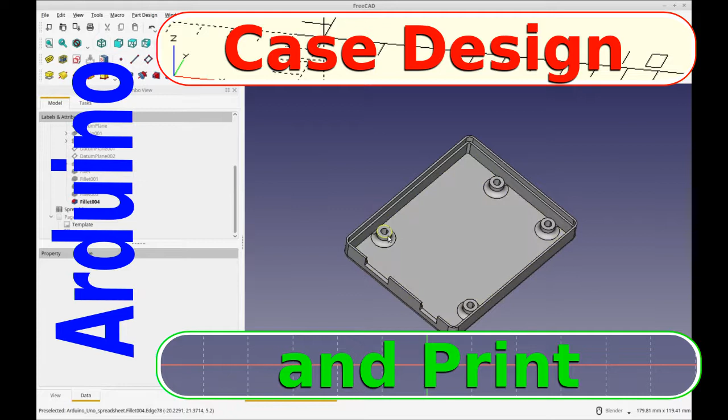Today I'm going to be starting a series on how to build a basic project box for an Arduino UNO. I'll be covering how to design the box as well as test the alignment for the posts and the USB openings. I will also be covering how to use the Spreadsheet Workbench and aliases to set values in your drawings.

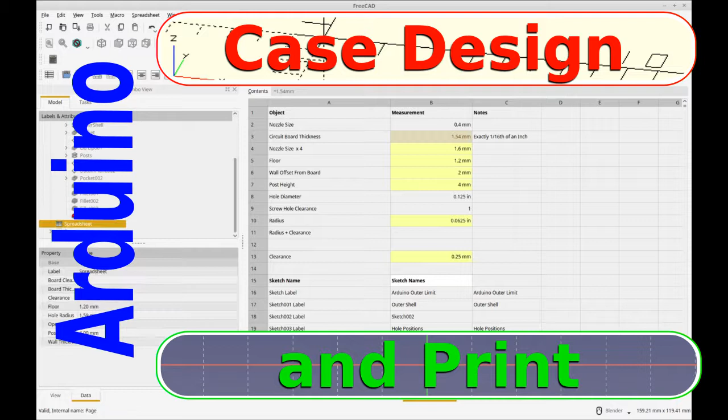The version of FreeCAD I'll be using is FreeCAD 0.17, the daily build, built on June 13th, 2017.

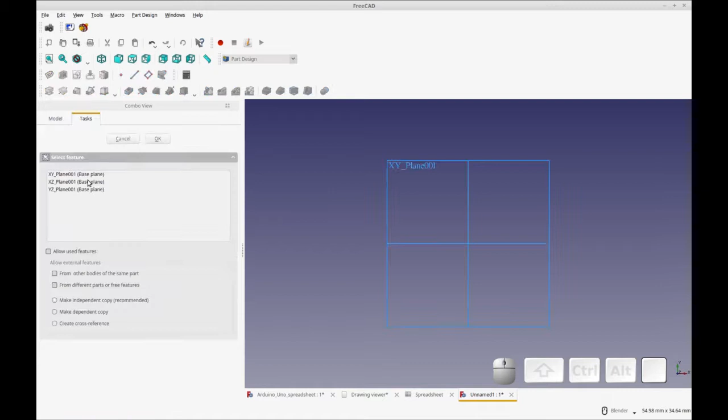To get started, we're going to create a new document, and using the Part Design Workbench, we're going to add a new part and a new body. Then to that body, we're going to add a sketch. The sketch will be in the XY plane, click OK, and then we're just going to add a rectangle to the sketch.

This rectangle is going to be a bounding box for the Arduino UNO, so we're going to set its dimensions accordingly. The Arduino UNO is measured in imperial units generally, so we're going to be using a drawing to get those measurements.

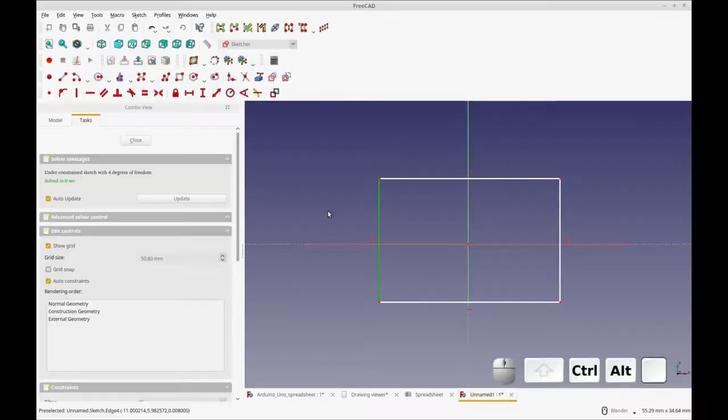The first measurement I'll add is the Y dimension, so I'm going to select that, and then let's move over to our drawing. You can see here our drawing of the Arduino UNO is in mils, that's thousandths of an inch. You can see that defined here, and the outside dimensions are given right in this text, although you could also deduce that from these values here. So it's 2700 by 2100.

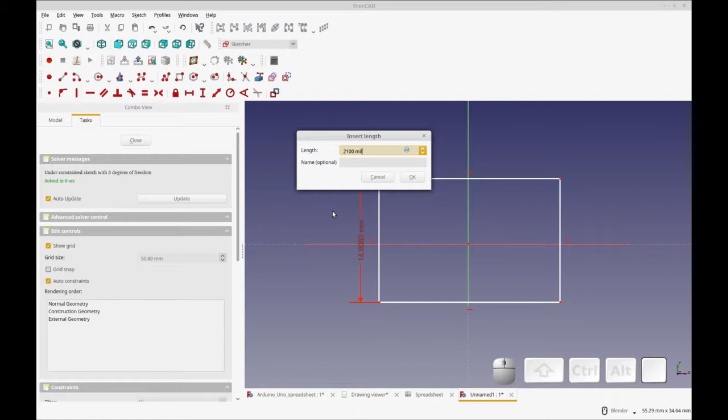So we're going to enter them in mils, and FreeCAD will interpret those for us. So you can do 2100 mil, and then just click OK, and you'll see that FreeCAD has adjusted it to millimeters.

We'll do the same thing for the horizontal or the X dimension here, and that was 2700 mils. Now I found that these dimensions aren't exact for my UNO, but I think they'll be close enough for most that you'll be able to use them, and if you need to adjust them in a tiny amount, you'll have to do so. You'll see that it's adjusted to millimeters for us, which is useful.

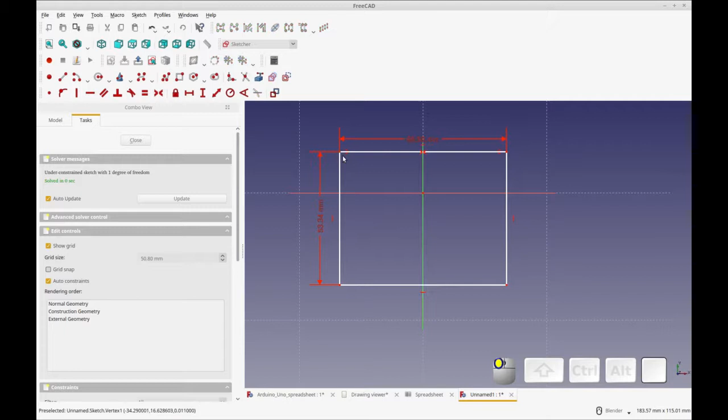Now we're just going to finish the constraining of this by doing two symmetry constraints, one on the horizontal and one on the vertical. And then this sketch is done.

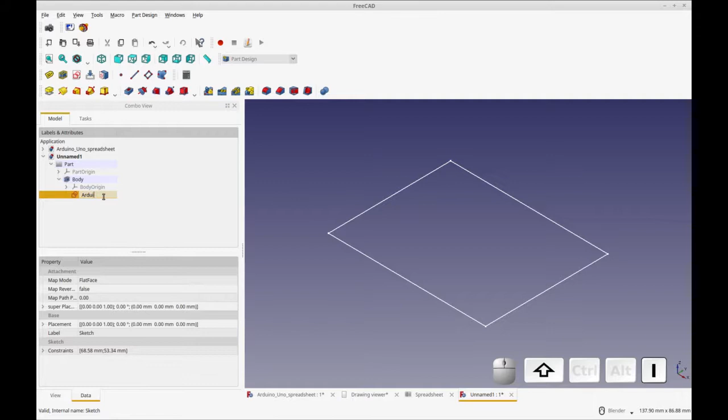Now this sketch is really going to only be used for reference, and it helps us to know where our Arduino is. After I finish constraining this sketch, I want to rename it so that it's easier to identify. So I'm going to call it Arduino Outer Limit.

The next step in creating our project box is to add a sketch that defines the outer edge. To do that, I've created a spreadsheet using the Spreadsheet Workbench. You can see the Spreadsheet Workbench is here, and I've given some labels and aliases.

So for the aliases, I just entered the value, and then in the Spreadsheet Workbench, you select the cell you want to change and click Alias, and then just type the alias in. So you see I've created nozzle sizes, wall thickness, UNO length, UNO width, and offset from board.

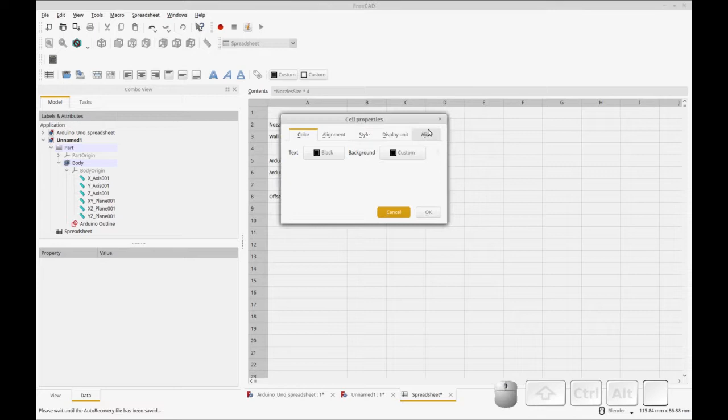You can also right-click on this, click Properties, and select Alias, and enter it there as well. The effect is the same. So we're going to use some of these aliases in the next drawing, wall thickness and offset from board.

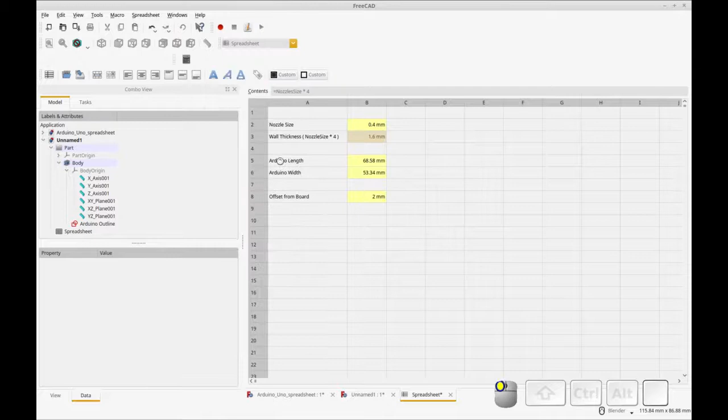So we'll need to change back to Part Design. We'll need to select the drawing in our tab here, and with the body active, which it is, we can create a new sketch. We're going to put that on the XY plane and click OK. And to the sketch we'll add a rectangle.

To constrain the lengths, I'm going to select the corner here and use external geometry to the Arduino board. Now it's not recommended to use external geometries unless you have to, and I'll show you a way to get around that. So next we're going to add the formula for this constraint.

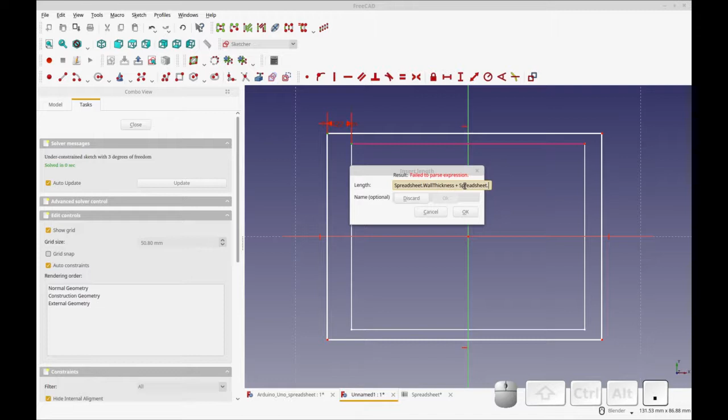To add the formula, you click on the f of x icon and start typing spreadsheet, and you can down arrow to select that, and we're going to do wall thickness, and it's plus a spreadsheet again. In this case it doesn't do the intelligent select, and this one is board offset.

Now you know you've typed it correctly because you've gotten a result back. Click OK, click OK again, and you see our value is updated.

To do the second one, we're going to do it a little different. I'm going to select that external geometry again, and we're going to add a constraint that way. But instead of doing it here, I'm going to show you how to do it outside of the sketch.

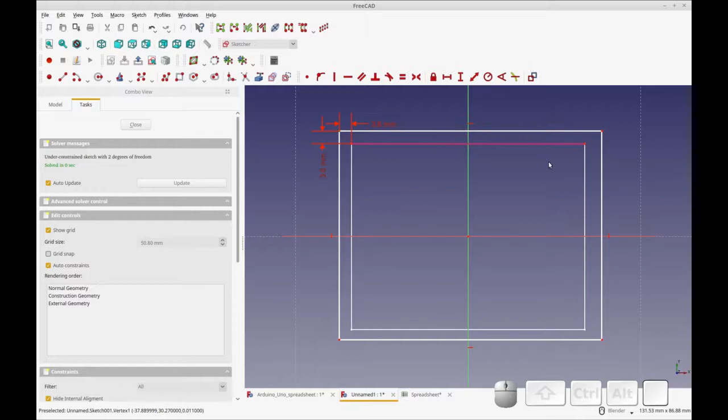Now we'll need to go back in our sketch and finish constraining this. I'm going to be selecting the two endpoints and the middle line and doing a symmetry, then I'll do the same thing on the vertical as well. Now you can see our sketch is fully constrained.

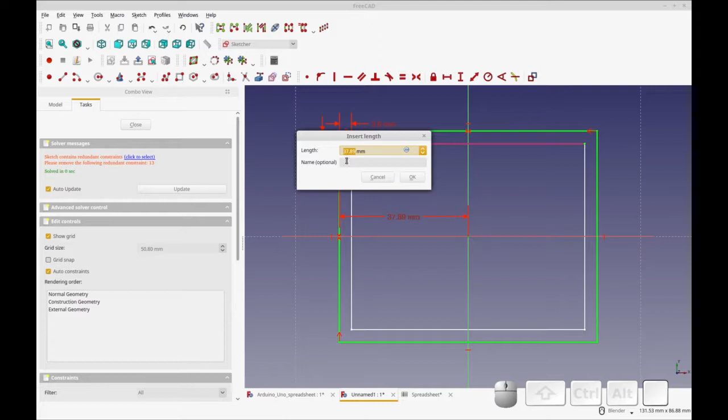If you wanted to eliminate this external geometry, which I recommend, what you can do is select this point and the center point and do a horizontal constraint, and you'll get your resultant measurement. Now this won't get updated by the spreadsheet, although you could put in another formula that's a little more complicated.

So with our sketch fully constrained, we can close this and move. Let's rename it real quick, and we'll say project box outer. Let's change it to project, and that sketch is complete.

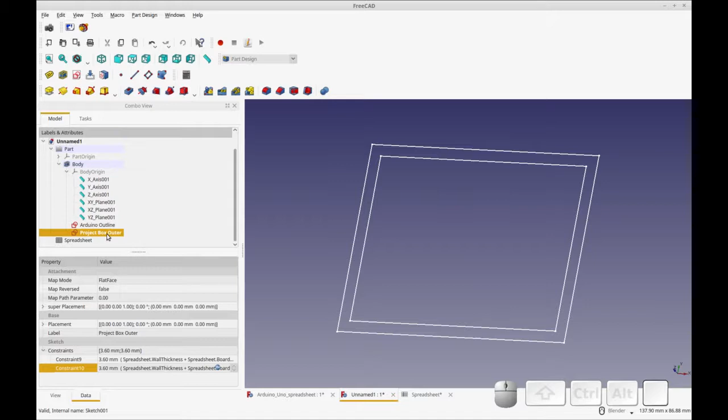The next thing we'll be doing is padding this sketch. So to pad the sketch, you simply, with the sketch selected, you select pad, and we're going to leave it at 10 millimeters for now.

With the pad completed, we're going to create a sketch to remove the inner portion of the case. So I'm going to select the upper surface of the pad and add a sketch to it.

Now I want to note here that developers have been switching to using datum planes to attach, but I found in smaller drawings it's not too difficult to manage with just attaching it to the surface.

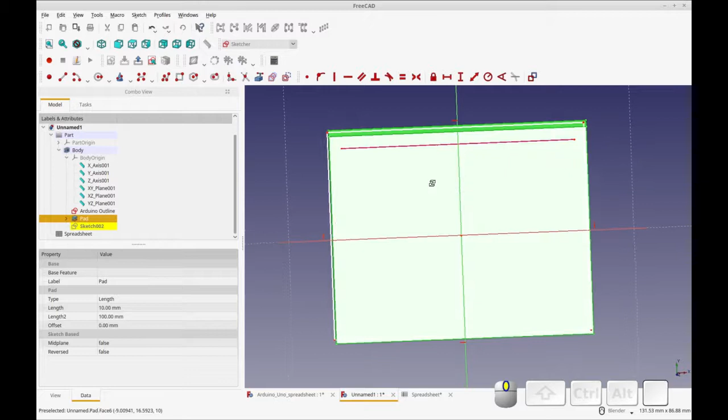So in order to constrain this, we're going to move back to the model and we're going to hide this pad so we can easily see the Arduino outline, and we're going to add the external geometry. So if I add the pad back, you will see that the geometry comes through, which is a nice feature.

So I'm going to select these two corners and do a horizontal constraint, and we're going to add just the board offset to this formula. I'm going to select the icon f of x, and we're going to do spreadsheet and board offset. So when it's just one parameter, it's really easy.

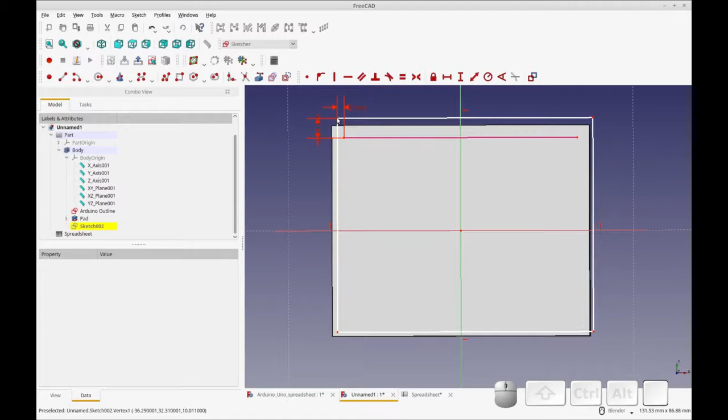So with that constraint selected, we're going to add a constraint here, but we're going to modify that constraint outside like we did before. So the final thing we're going to do is add symmetry, and we'll add symmetry here as well. And that fully constrains our sketch. You'll notice it's too big right now, but when we change it, it'll be okay.

So now we're going to close the sketch. We'll select it here and go down to our constraints, and I'm going to copy the constraint and paste it here. Oops, try that again. And you'll see it updated the sketch. So that's part of how to do parametric.

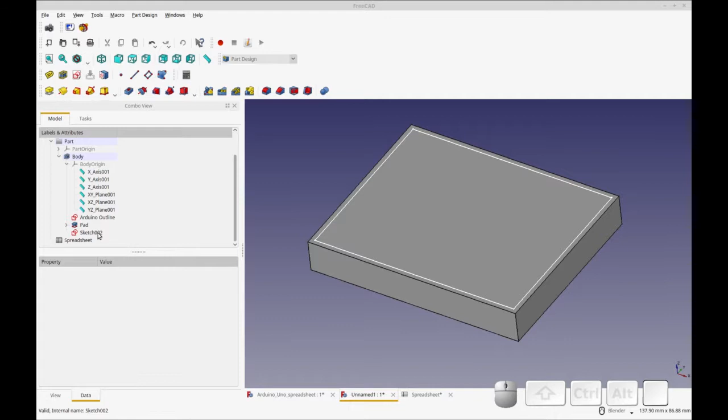So now the next thing we'll do is we're going to pocket this down into the pad. To create the pocket, select the sketch we just created and then click the pocket icon. We're going to leave this at 5 as we'll be completing the depth with a formula.

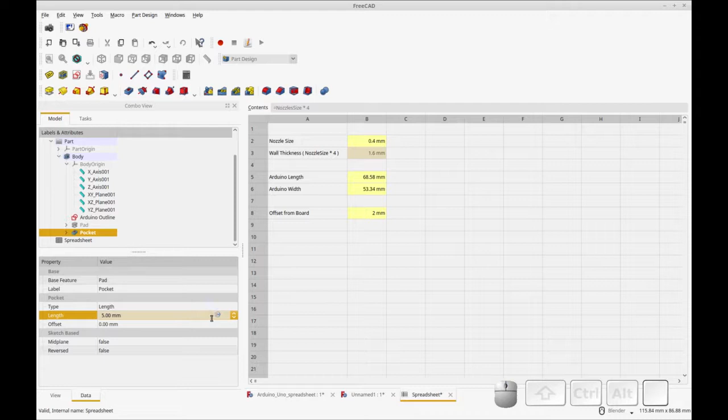To create the formula, select the pocket and then in the length field select the function icon. We'll be using values from the spreadsheet. So type in, first we'll add the pad length, so type in pad, then period, then length. You can select it from the drop down list and you can see it's already got the 11 millimeter result, which is the length of this pad.

So from that length we're going to subtract the wall thickness in the spreadsheet. And that alias is here, and it was wall thickness.

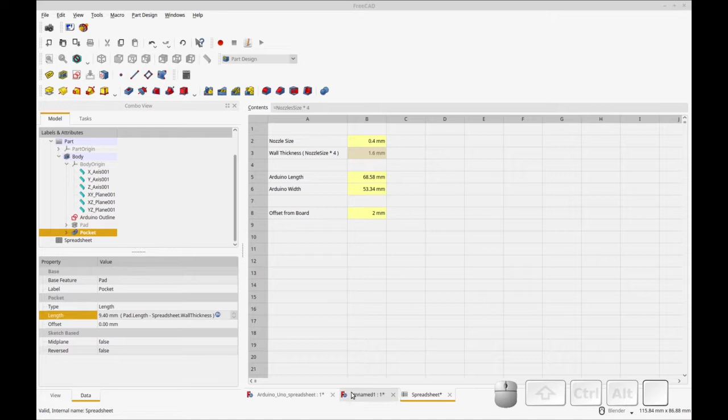I think it's a capital T. Right, so now you see the result is 9.4. So that'll give us a more robust solution, that as this pad changes, this pocket will change accordingly.

You'll notice I've now got an error introduced into the pad formula, and that's a bug in FreeCAD. The problem is that this alias doesn't specify a unit. Even though it's displaying with millimeters, the actual value doesn't have a unit, and that's because I can't enter a unit there on that formula.

The fix is sort of a typecasting, and you can see the fix down in here is I multiplied wall thickness times 1 millimeter, so to infer the unit. So that's fixed on this one.

You see it gives me a proper result, and now I'm going to fix it on this one so you can see that in action. So I multiply the wall thickness, so that's the one I can't have a unit on, times 1, and that fixes that error there, and it should propagate up. Yeah, so that fixes our error. So that's a little extra workaround included with the video.

Now that the pocket is complete, you can see how our formula is valuable. I'll change the size of the pad, and you'll see that only the walls change and the floor stays at the correct distance for printing.

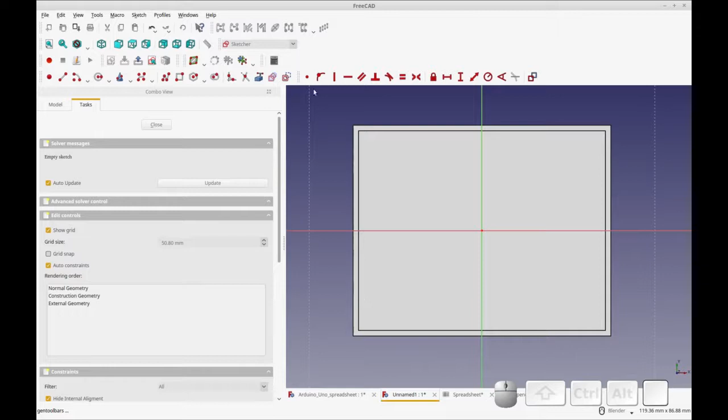I'm going to select the same plane and add a sketch to it. I'm going to create a rectangle and constrain it much the same way I did before, using the Arduino outline, and we'll hide the pocket. We're going to create external geometries here, and we'll create a constraint this way.

In this case, it's just going to be simply, I think, just wall thickness. So let's look that up in the spreadsheet to find out. The measurements we're going to use are from the spreadsheet. It's going to be wall thickness, divided by 2. And because of, actually I'll add that later, then it's going to be plus

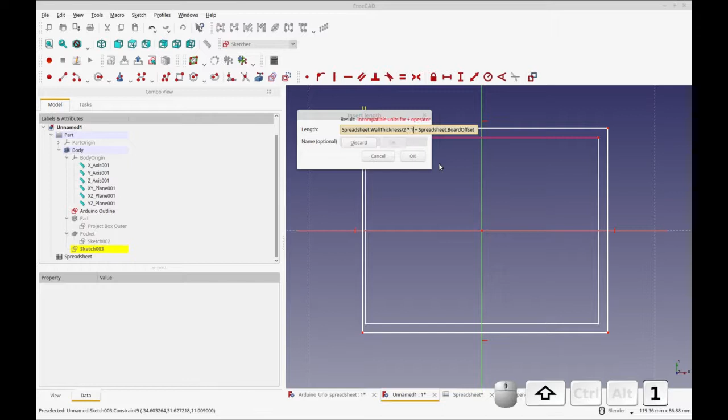spreadsheet and board offset. Now that's going to be incompatible like before, so we can just multiply this by 1 millimeter to do a typecast sort of fix. So that's our setting there, and then we'll do the same thing for this guy.

And I'm just going to change this right. Now you notice I don't have to leave the sketch to make this change. So I can edit this.

Now depending on your version of FreeCAD, you may not have to do the 1 millimeter fix. This was a bug that I think was introduced somewhere along the point in 0.17.

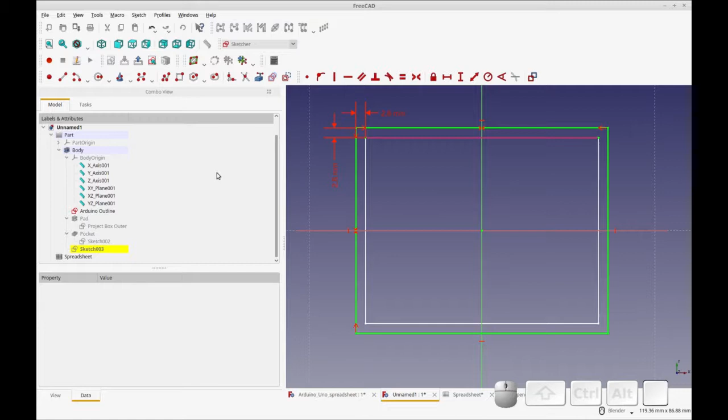So finally for this sketch, all we have to do is add a symmetry constraint in both directions, just like before. So this process just repeats a couple of times for these alignment things. And let's close the sketch to see if we got it right. So you see that ledge is halfway between these two.

So now we're just going to pocket it. In this case, I'm just going to pocket it 3 millimeters. I'm not going to make that parametric. Now that pocket will follow the top.

So if I change this pad, that pocket should follow along. Yep, so that would be a little bit too much, I guess. And let's put it higher. And you see that follow along nicely. So you see this still works.

We don't need datum planes yet. So I think as long as the items aren't too complex, you shouldn't need datum planes, but you can't take that to the bank.

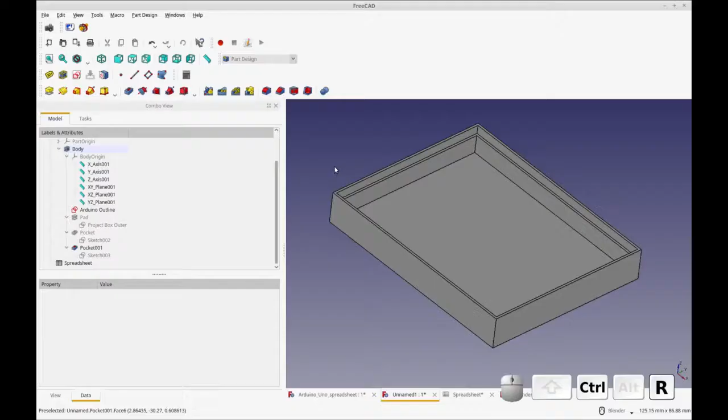With the basic shape of the project box complete, we'll add post mounts for the Arduino on the bottom of the case. We'll select the bottom of the case, and with that face selected, we'll add a sketch. On this sketch, we'll add 8 circles.

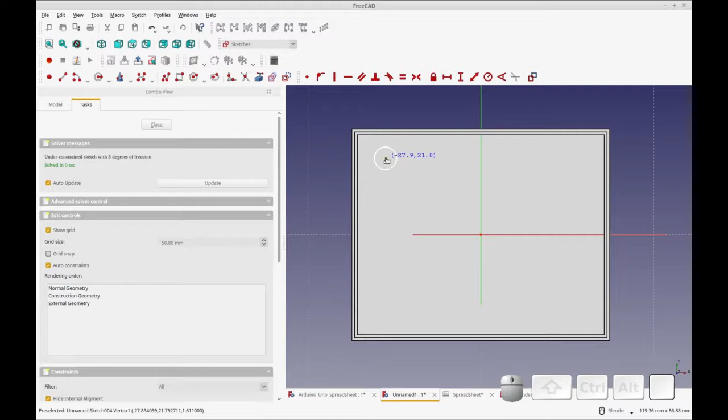So to create the post mounts, we'll add 2 circles in each corner. They'll share the centers, so that'll create a wall for each post. So we'll do that in each corner. And after we've created the four circles, we'll set the radius.

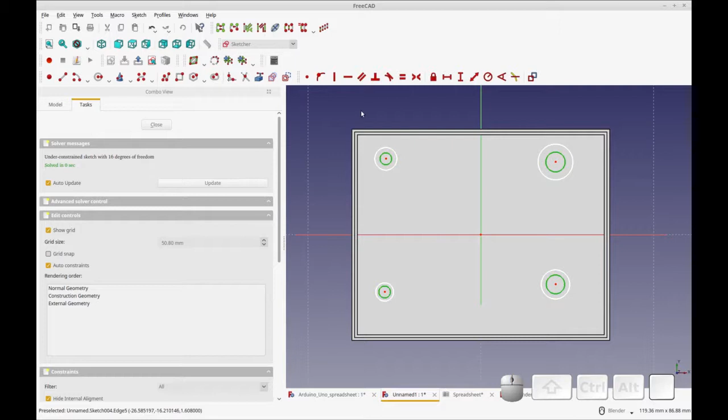To set the radius, we'll select all 4 inner circles and click the radius constraint. We'll share all the constraints, and the value will be 1.5 millimeters. To set the radius for the outer circles, we'll select all four and select the radius constraint. We'll share the value and set that to 3 millimeters.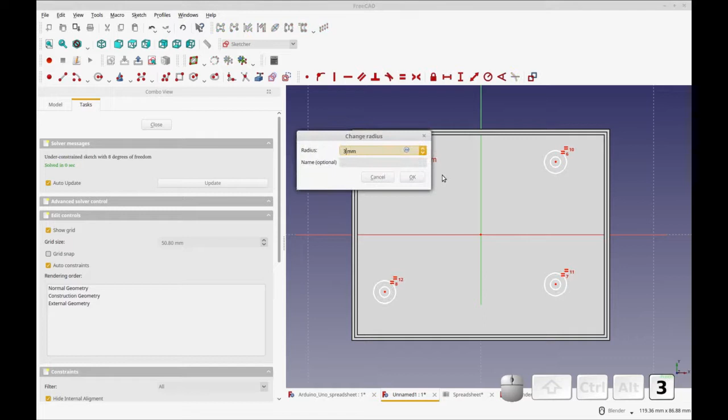To set the position of each of these posts, we're going to be using a different drawing, and this drawing shows the dimensions of each post in relationship to each other, pictured here, and you can get it from this link, which I'll put in the show notes.

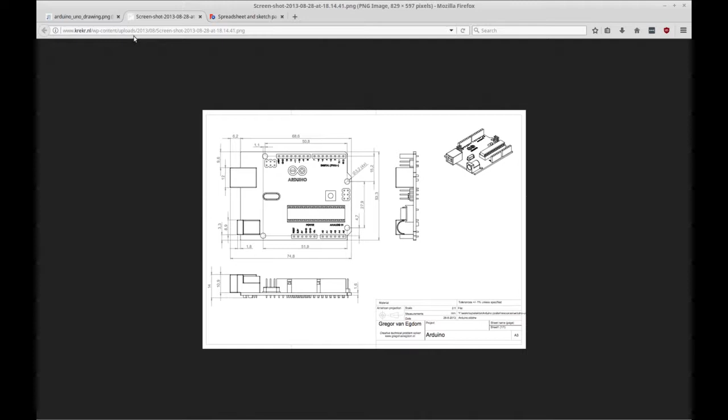So the way this works is we move around the whole object, constraining each post to each other. The difference in length between those two post centers is 1.27 millimeters. Then the next one, from here to here, is 50.8 millimeters. And I do from here to here... or, nope, sorry, I'm going to do from here.

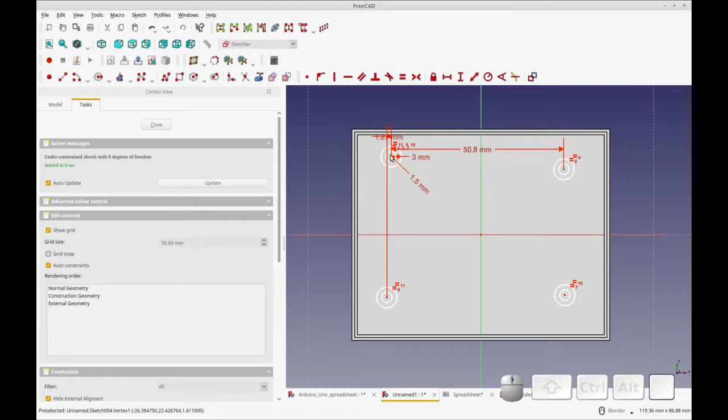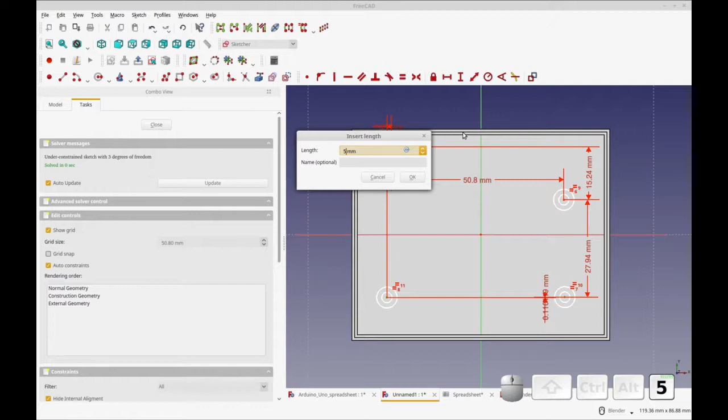We're just basically going around the square, setting all the offsets from each other, and you see how it's just going to push each post into the correct position. Finally, that's 27.94. And then this one is offset from here, and that measurement is 5.08 — I had to look down for that one.

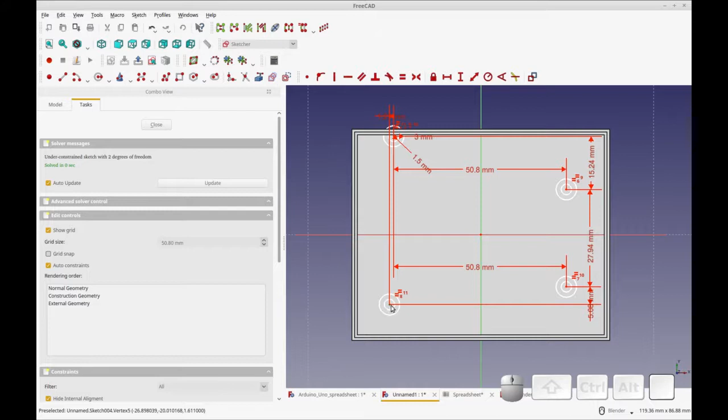And then finally it's the distance from here to this point. So we're just kind of going around in a circle or a square. So then they're constrained to each other — you see how they all move in. So the final one is the distance from this corner to the corner of the Arduino.

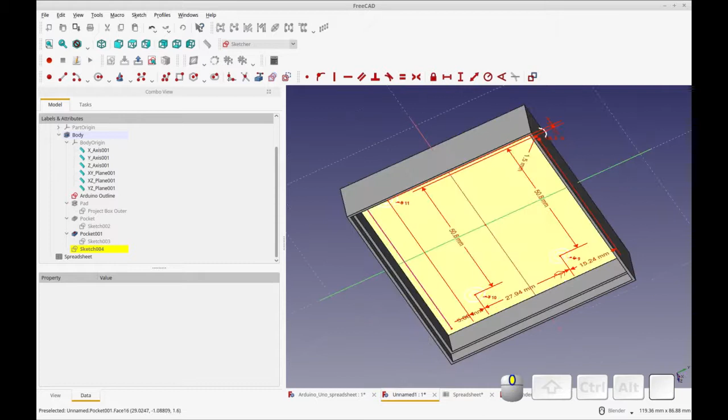So we need to bring in the Arduino outline. Another way to get external geometry instead of hiding is you can just rotate. So there's my Arduino external geometry, and I can select it, and then it'll show through to the working plane.

So now all I have to do is set these final distances. The distance from this post to the edge of the Arduino is 3.97. And then this post to the edge of the Arduino in this direction is 2.54.

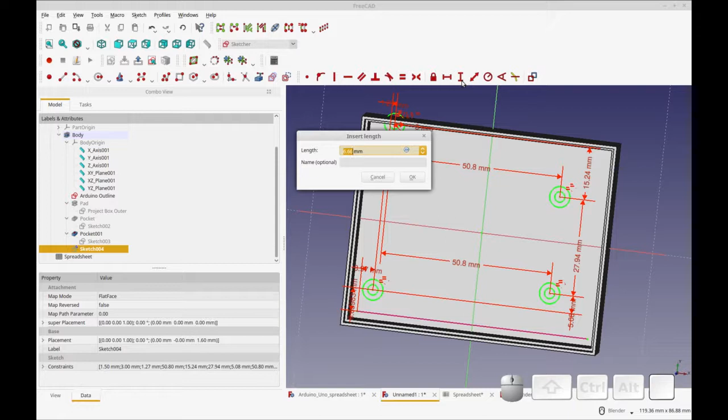And you see now our posts are fully constrained.

Once our post sketch is complete, we're going to add a height of the posts in the spreadsheet. This is so that we can easily change the height of the posts. I've added a variable, or spreadsheet entry, here for post height of 3 millimeters, and I'll use that when I'm creating the pad of the post.

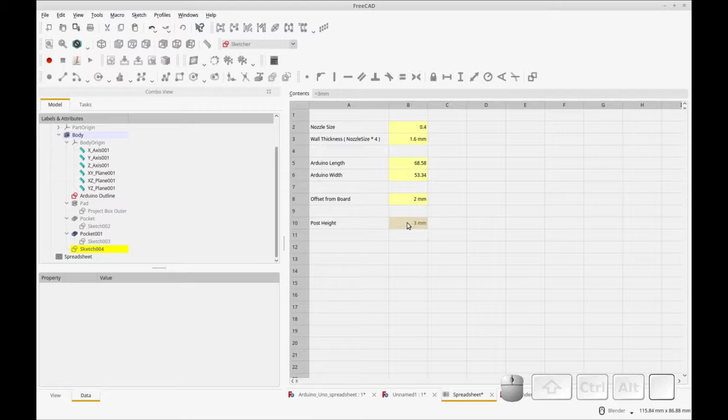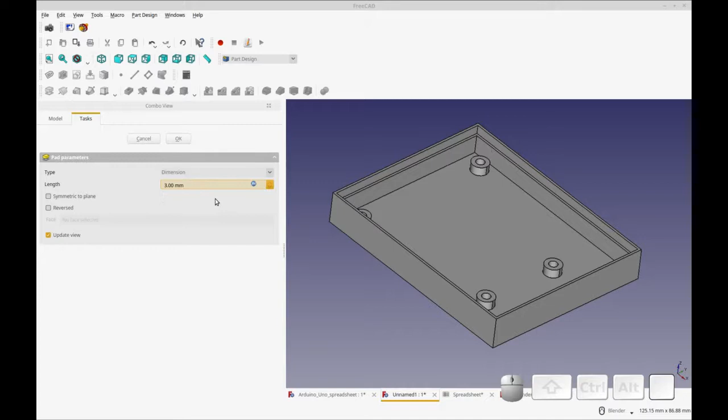So we'll move back to the drawing, close this sketch, and pad this sketch. In the pad value we'll go to the spreadsheet and select post height. That will allow us to move the posts up and down as needed.

I selected 3 millimeters so I had plenty of clearance for the soldering tabs underneath. The very last thing we'll do to this case is add fillets.

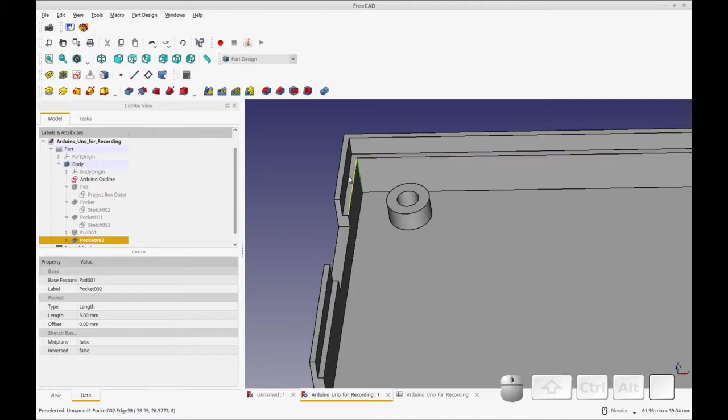What I've found is to get larger fillets on the outer corners, you should do the inner corners first, because I want a 3 millimeter fillet on this, and if I don't do these first, that would make the outer fillet — if I did the outer fillet first, it would try to be inside this corner, which would make it invalid, and FreeCAD won't let you do that.

So I selected one line segment to start my fillet, and it adds it with a 1 millimeter value, which is what I'm going to use. Then I'm just going to do add reference to each of these corners.

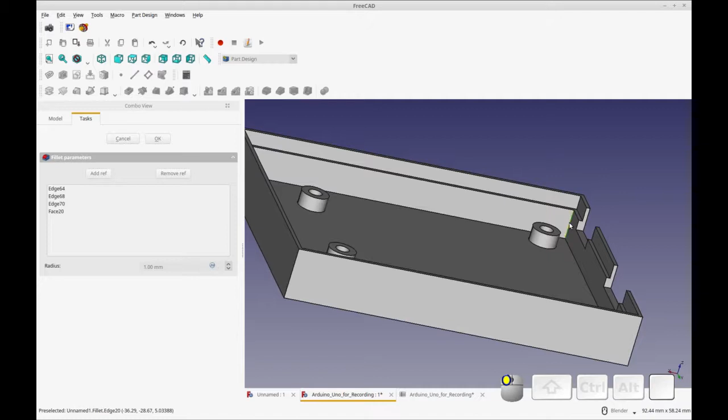I mistakenly selected the face, so we're going to do remove reference, then add reference again. And so that's our internal fillet.

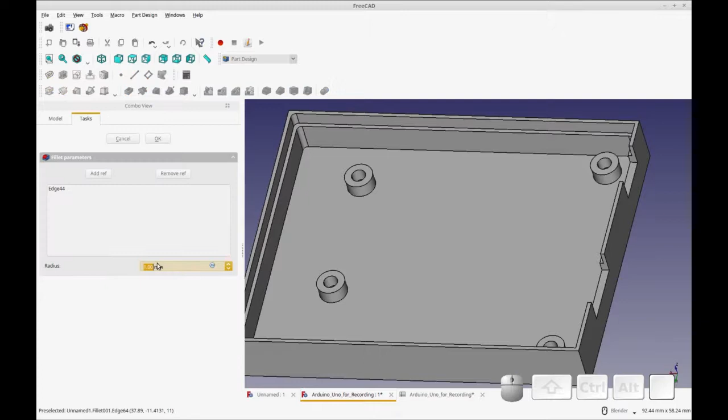Now I'm going to do this fillet. I'm going to select one of these — this is going to be a 2 millimeter fillet. It might not be the exact correct value, but that gives it a little bit of continuity around the corner. I'll show you at the end.

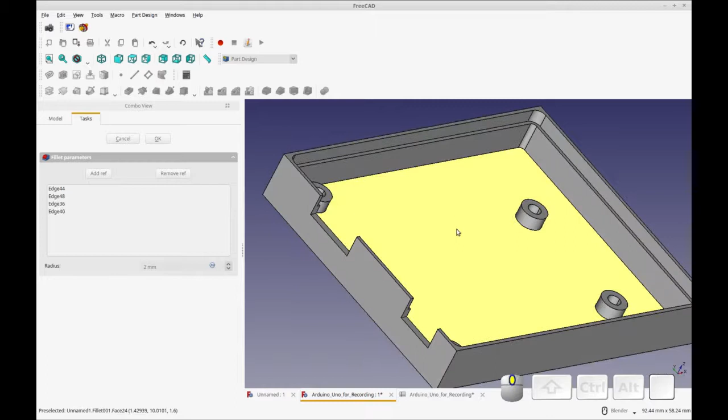Now I'm going to add each corner as a reference. You can actually select all of them at once before doing the fillet, but I find I do a lot of misselections that way, and I get the job done better this way. So that's a 2mm fillet, and then on the outside we're going to do a 3mm fillet.

I'll show you that using the control key, you can pre-select the segments you want. Okay, now I'm going to add the fillet for that, and that's going to be 3.

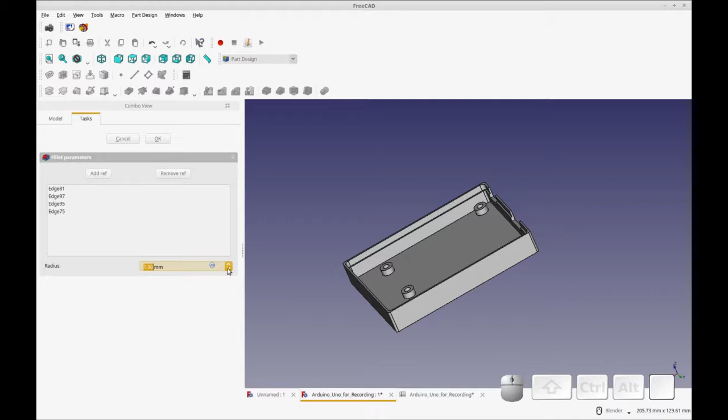And then on the bottom, I've filleted this before, but I found that when I print it, it just comes out as an angled line. So this time around I'm going to try it just flat and see if I like that.

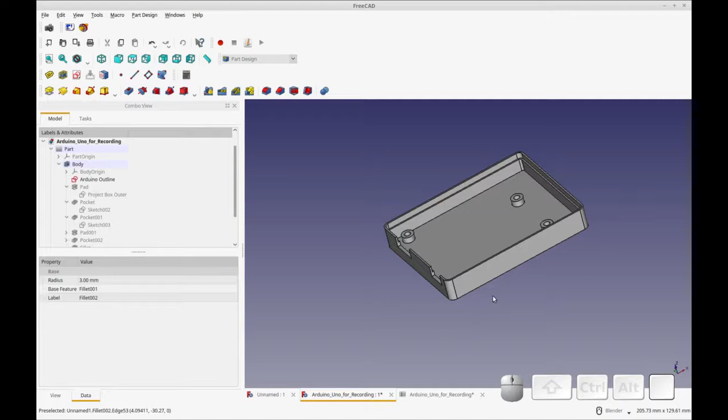In the pictures I'll show you soon, you'll see this bottom corner rounded, and you can do that. I'll show you real quick: if you select the whole face and then just add a fillet, you'll see it adds it all the way around, and you can make that as big as you like.

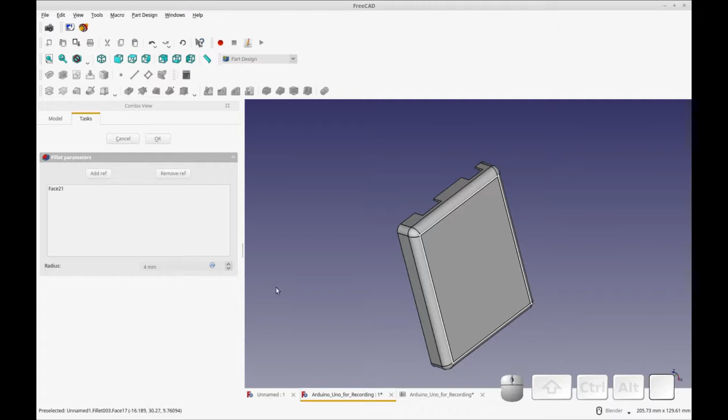Actually that's probably going to be invalid because that line's poking through, so you could fillet that if you want. Actually, I just will. So that's our finished model.

So the next thing we're going to do is go into TechDraw, and what we're going to do there is get drawings to make sure our measurements came out well. Now that our project box is complete, we're going to go over into the TechDraw workbench to make some drawings. You can select the TechDraw this way.

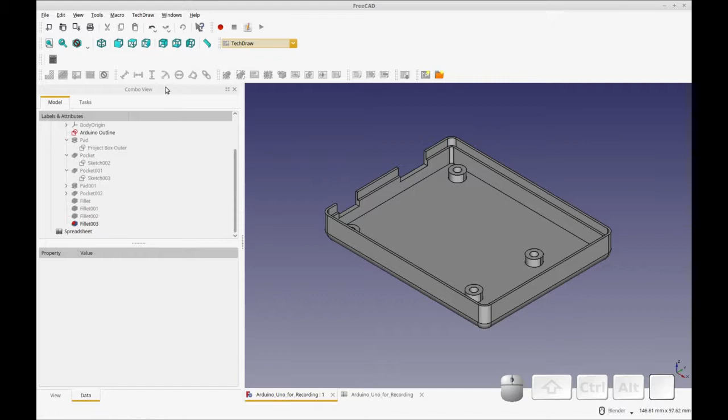These two icons sometimes show up over here, sometimes over here, I don't know why. So I'm going to insert a new drawing, and you'll see it's scaled to A4, which is good if that's your printer. Mine's not—mine's in the US, so I need a US size. Unfortunately there's no templates for US.

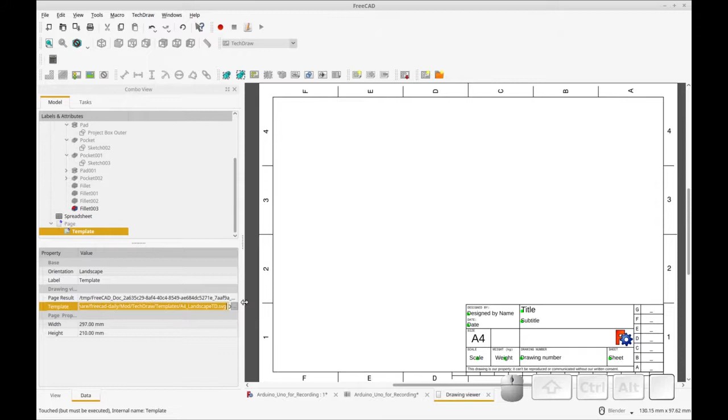So what I did was I created one in Inkscape and put it in the template directory. What you can do then is go into this template, and you can see this is where it's stored. Thank you, developers, for listing the directory—that helped a lot. I can select the directory and then pick the 8.5x11 I made. I don't think that template is perfect, but it works well enough for me.

And why it's important to have the correct size paper—I don't want my printer resizing anything, because I'm going to use this to test my drawing.

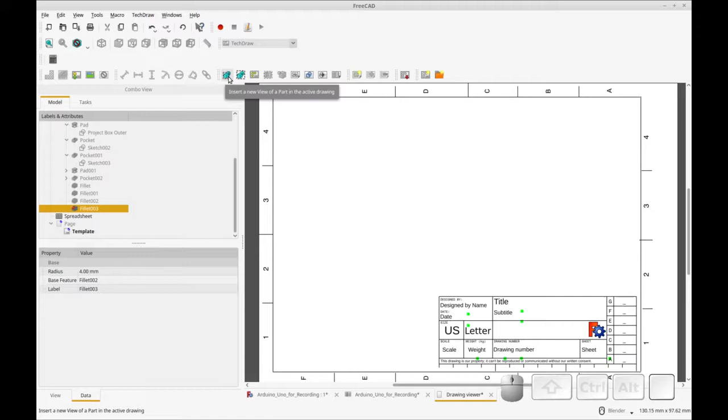So now what you do is select the final item or final feature in your drawing, and add that to—I've lost it, this got moved too—so, you add that to your drawing. We're just going to do the one part.

So now I do want an end view of that, and just to show you the feature, I'm going to show you, let's see, where was it—I'm going to show you how to do a section view.

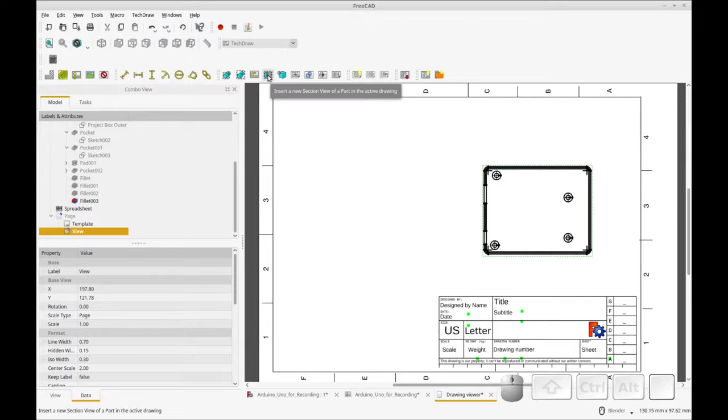So it's using this section view icon here, and you just click that, and then it asks you what section view you want. For me it doesn't matter—I just want the USB port and the power port, so I'm going to do this direction. So I'm going to pick this, and you see it's put our section view in there, and that's good enough.

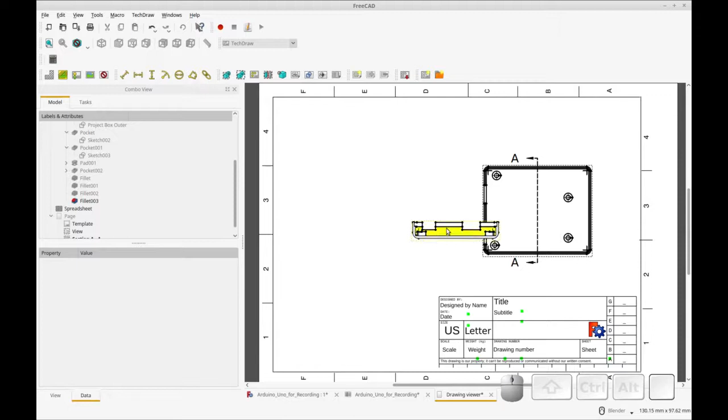So now I really don't need the cross-section view, I just needed the openings, but this certainly doesn't hurt to know. I could test the post measurements too and stuff like that.

But what I need to do is print this out, and I'm going to be holding my Arduino right up to it to see how close I am. And one of the things I do know is that these lines are too thick for that.

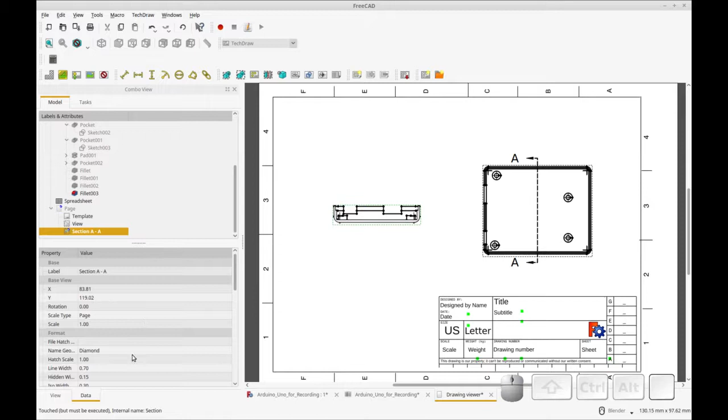So what I'm going to do is go into the section view and change the line width to just half of what it is here, so now when I print it out, I can see a little bit better if the Arduino lines up.

And I'm going to do that to this as well, so I'm going to change the line width to 0.35. And then, so now I can just print this. I would just go into File, Print, and it's going to print. I'll do a print preview, so it's going to print your drawing page.

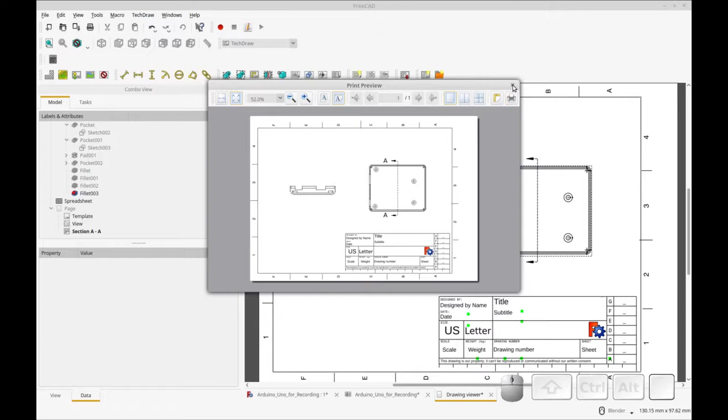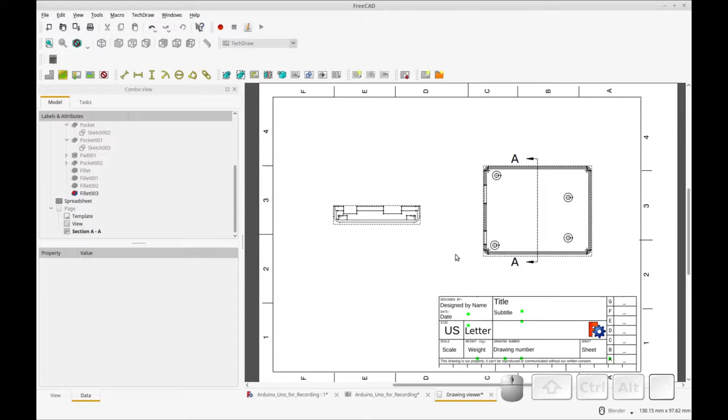Very useful, and I have to thank Ben Heck for saying test it with a printed piece of paper instead of printing. Next I'm going to show you some photos of the Arduino aligned with this, and how you can tell if your drawing is accurate.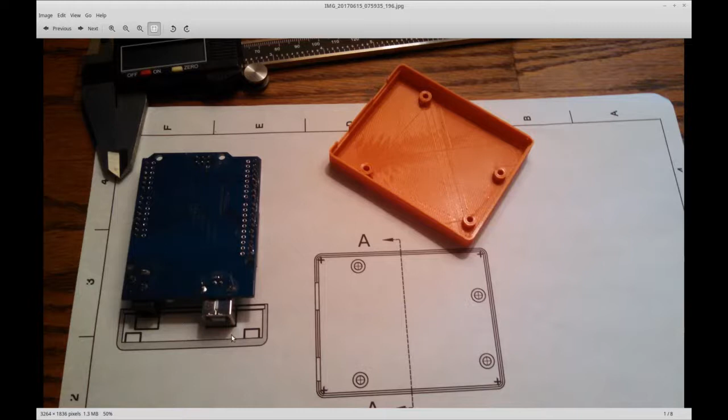I'm going to have to adjust those before I can get a good printout. But for now, I'm going to show you some pictures of the Arduino lined up with the USB port and with these crosshairs. Here I have my Arduino sitting on top of the cross section of the USB port, and you can see that it just fits in there, as well as the power port. If you look carefully, even into shadow, you can see that the power port is a little misaligned, and I think that was before I did the clearance variable. Here you can see in my final output the power port and the USB port.